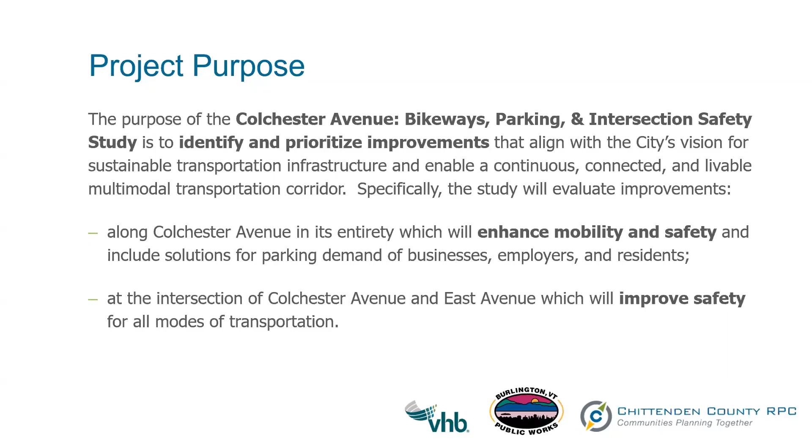The needs of the study were defined as the need to improve intersection safety, improve corridor safety, enhance mobility for bicyclists, and include solutions for parking demand of local businesses, employers, and residents.

And since we took a bit of a hiatus from the project, we thought a quick refresher seemed appropriate. So if you'll recall, last December, we had a local concerns meeting. Through multiple meetings with the advisory committee and the project team, we translated the existing conditions assessments we had done and those local concerns gathered from the community into opportunities and constraints. These opportunities and constraints, along with the project purpose and needs statement, really provided the guidebook for development of alternatives for the corridor.

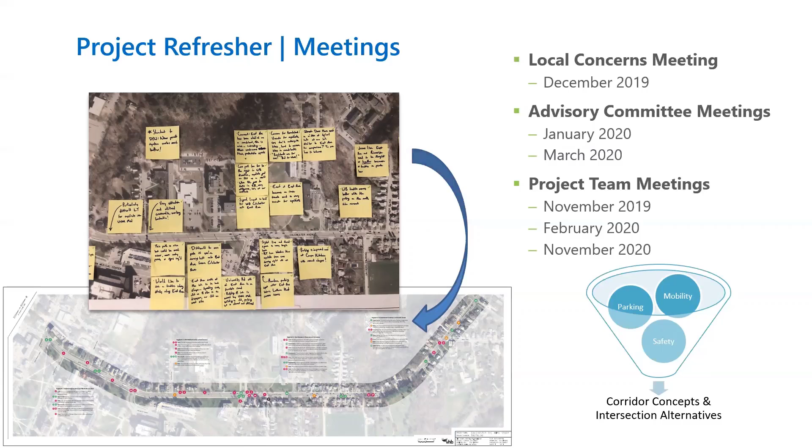It's important to note that there were really a broad range of concepts considered for the corridor, and acknowledge the efforts of the advisory committee and the project team to really narrow those concepts into a viable set of alternatives. This was particularly true for the bike mobility enhancements on the corridor. There were many options considered to improve bicycle mobility, including two-way cycle tracks, but ultimately, from the many options listed here, we narrowed them down to a set of really feasible solutions for the corridor.

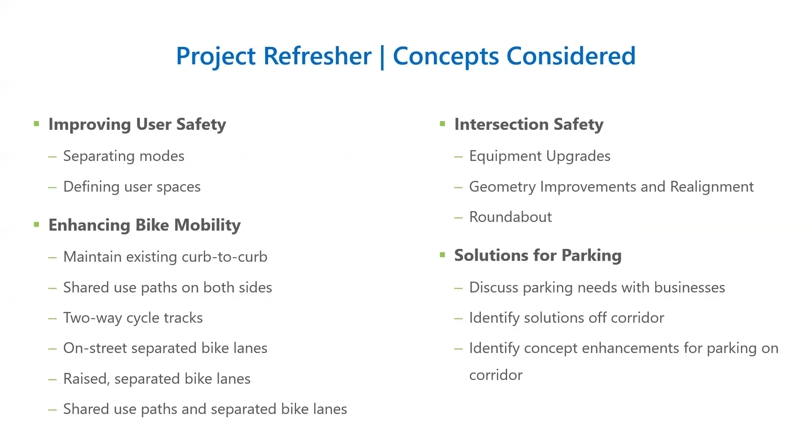It is important to note that short-term improvements have been exhausted along this corridor, and are really what exists out there on the road today. And so all of the alternatives that are considered here really require roadway reconstruction due to shifting curbs around.

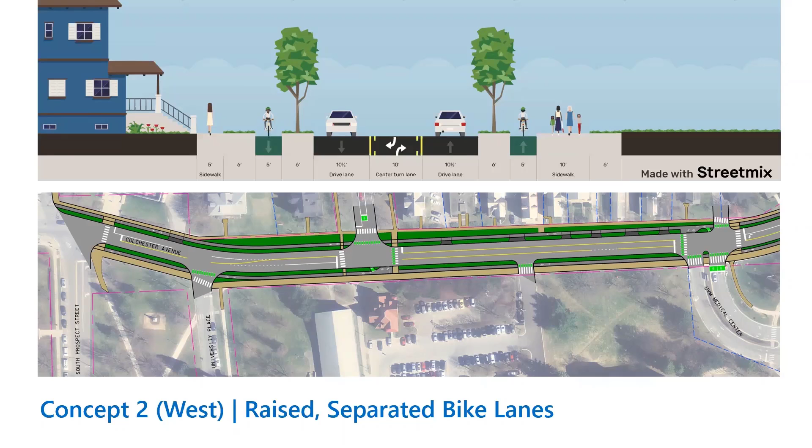And even with the widened grass strip, the area of impact does not extend beyond the existing back of sidewalk or back of shared use path on the south side. And given the vertical separation of this particular corridor concept, there's naturally more space for bikes and peds to operate separated from traffic. And continuing along this section, the grass strip does narrow. However, there's still enough space for a key feature of this particular concept, and that is a space provided for 2-stage left turns for bicyclists out of the street.

And this became an apparent need during our local concerns meeting, as there was a desire for improving conditions for east to west traveling bicyclists to access driveways or roadways or intersections along the corridor. And this concept accomplishes that while keeping the turning bicyclists separate from vehicle traffic and out of the way of through bicycle traffic and pedestrians.

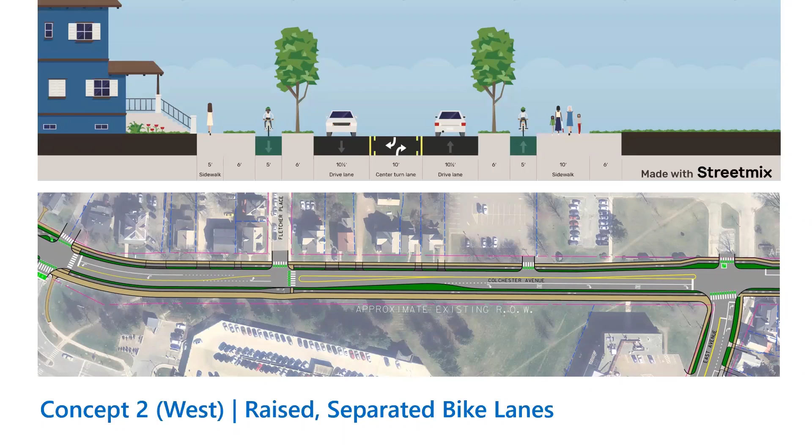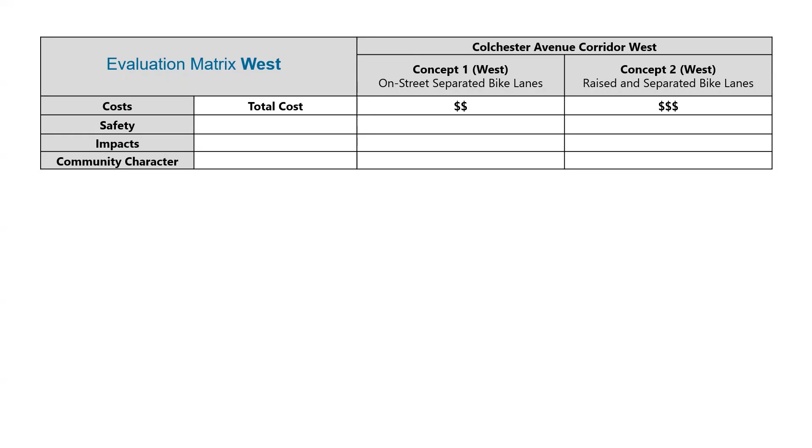Now, in order to better understand the impact and implication of these design concepts, we've developed evaluation matrices to compare side-by-side the critical concept factors as listed here, being cost, safety, impact on the built environment, and community character. Now, it's important to note that the cost evaluations are presented on a relative cost scale, as in one versus the other. So in our case, as Karen touched on, the big cost generated for each of these concepts is always going to be the relocation of the curb that comes with the widening of the roadway and significant reconstruction as a result. And the larger cost for concept 2 comes from the design implications of raising the bike lanes to being slightly separated from roadway and sidewalk grade, as opposed to just striping them in concept 1.

Now, the two concepts provide protected and separated facilities for all modes using this corridor, being pedestrians, bicyclists, and vehicles. And as a result, we see improvements to safety across the board. The main difference in these two concepts is that we may not see the quote unquote interested but concerned cyclist population with the on-street separated facility design, as there is still a certain level of perceived exposure to vehicular traffic when you're on the same grade operating as a bicyclist. Whereas these users are more likely to be comfortable along a raised and separated facility. And we've called out that these concepts also see improvements to pedestrian safety as well, because bicyclists currently using the shared use path along the south side will now have their own exclusive facility.

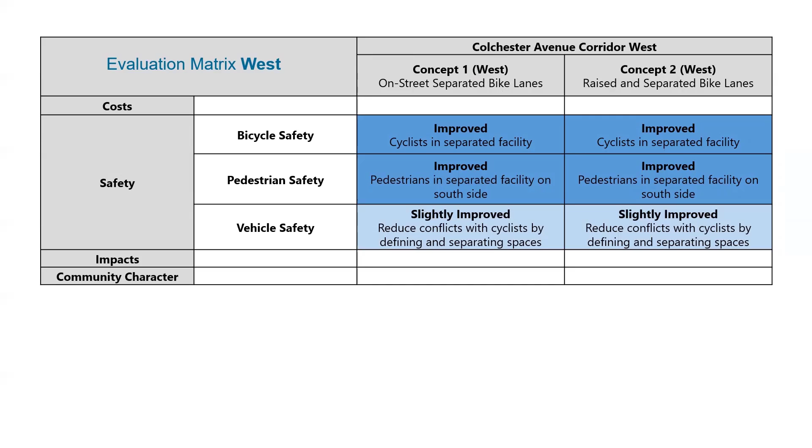And similar to the safety, we have similar impacts across the board for these alternatives in assessing this list of impacts we see here. And utilities will need to be shifted or relocated as a result of the shifting curbs and greenbelt. And as we have mentioned, all of the lower impact improvements have been made on the corridor. So when it comes to constructability with any of these alternatives, we see a major effort for that particular part of the evaluation of these alternatives.

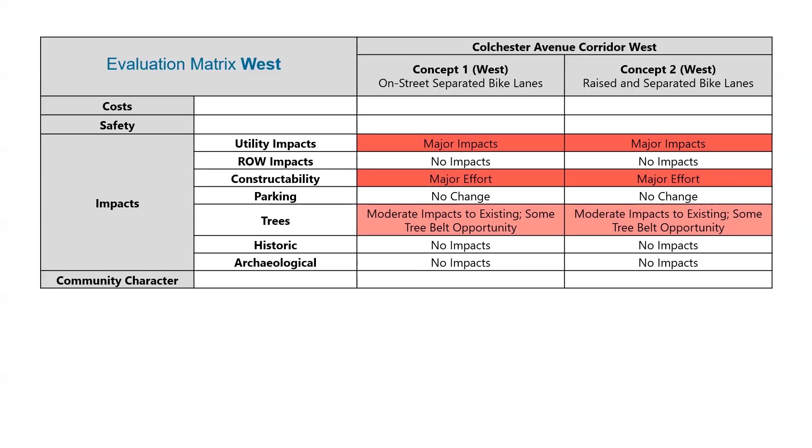And then there is no existing parking along the corridor, therefore no change. And then we are anticipating moderate impacts to some existing trees, given the modifications proposed to the tree belt. And as far as the final evaluation matrix row here for community character, concept 1 generally holds the existing aesthetic character of the corridor, while concept 2 we see as an improvement, given the improvements made to the greenbelt by widening it nearly the full length of the corridor, and in particular widening it to the west of the UVM Medical Center driveway to allow for tree plantings.

Thanks, Drew. Now we're going to jump into the eastern end of the corridor. We will go through a number of concepts for the sections along Colchester Avenue, between East Avenue and Barrett Street. Like the western sections of the corridor, concept 1 east changes the curb-to-curb width to better accommodate on-street separated bike lanes with buffers and a vertical element. So the key features to note with this concept are similar to concept 1 west, where there was a 5-foot bike lane and 3-foot buffer with that vertical element. In this section, however, there are a number of driveways, so the locations available for those vertical elements will be limited to allow access into those driveways.

Although the right-of-way line, which you're seeing here in sort of the pink color, is beyond the back of sidewalk, we attempted to limit the impacts to those adjacent properties where that generous right-of-way space is utilized as folks' front yards and off-street parking space. Along this section, there's a minimal green belt. There's one segment between the Centennial entrance and Green Mountain Cemetery where we'd expand that green belt, allowing for space for trees and other plantings. The segment in front of the Green Mountain Cemetery and around the curve in Colchester Avenue would require no green belt, just to avoid the significant slope work that would need to be done in order to extend beyond the existing back of sidewalk as it is today.

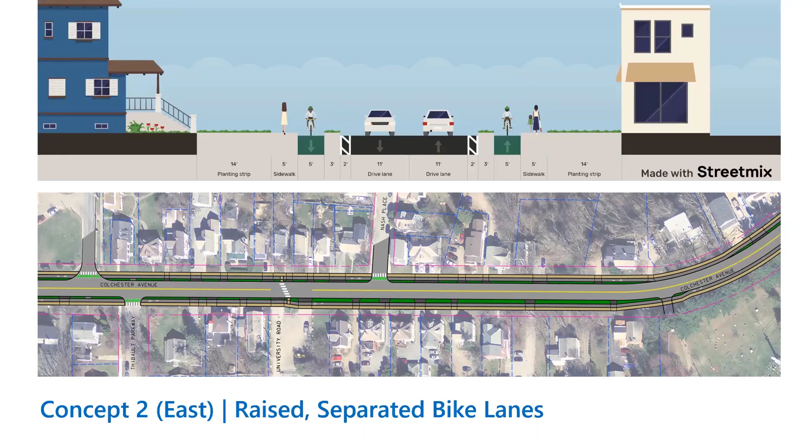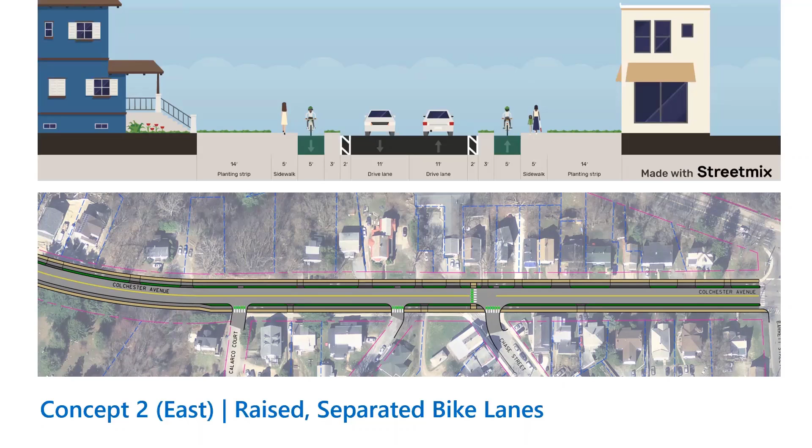And now we have our new concept 3 for the eastern section of the corridor. And this is just a reminder that for mobility, representing bicyclists and pedestrians, this cross section is generally the same as concept 2. The big difference here comes with the enhancements being made in an attempt to address the need for parking for residents and parking to support the local businesses along this section of the corridor.

And we can see that while the cross section is similar to concept 2, there is the addition of the on-street parking. And this truly represents the balance of trying to implement this parking while maintaining consistent facilities for bicyclists and pedestrians and other users along the corridor. And given the presence of businesses such as Kathy's Flowers and Campus Kitchen, during our local concerns and early public outreach efforts there was an express interest for parking to be retained along this segment of the corridor as much as possible. And that's what we've tried to show here.

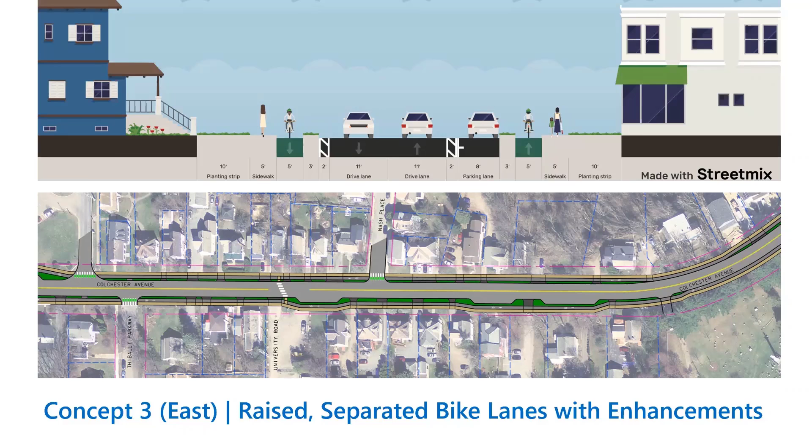And now east of this section, down to Barrett Street, the cross section and layout remain the same as concept 2. So we're going to skip ahead right into what we're referring to as concept 3A.

This concept was born as conversations developed with Campus Kitchen. It was noted that there was a strong desire to evaluate the possibility of maintaining short-term parking that would allow for high turnover parking and loading and unloading immediately in front of their location as it currently exists today. As a result, this specialized concept 3A was created. Concept 3A really mimics concept 3, as I'm sure you could have guessed, in its inclusion of on-street parking in select lower impact areas while also pursuing on-street parking immediately in front of Campus Kitchen.

Now, given the need to balance space for all users in this tighter cross section, this concept calls for a change to the corridor dynamics for bicyclists and pedestrians for the short section. That is highlighted in yellow on this slide, which is the creation of what we're calling a mixing zone, similar to a shared use path, immediately along the frontage of Campus Kitchen.

Given the nature of vehicular turnover in this location and parking and accessing Campus Kitchen, the project team believes it makes sense to really encourage slower movement speeds, particularly among bicyclists at this location, and create this shared space mixing zone. So that's what we've tried to do here in this short section with the narrow 8-foot shared use path across the frontage. We see this concept as truly representing a compromise for all modes in the greater interest of addressing all of the needs of the project as previously stated.

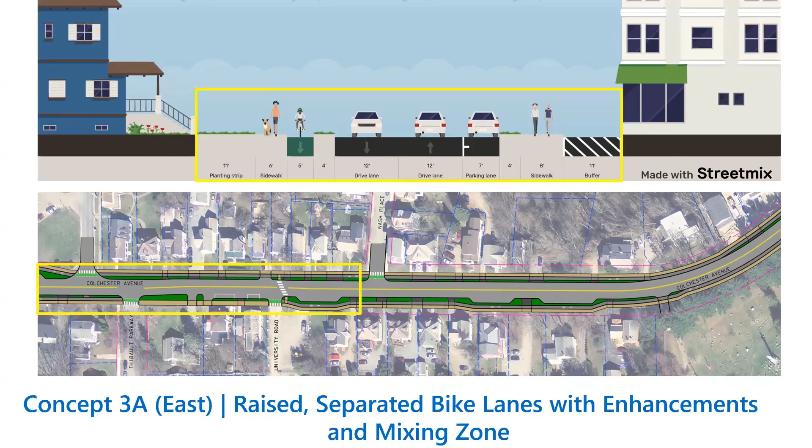All right, and with concept 4 East, we're taking a similar approach to the existing western section of the corridor, where that shared use path that was recently put in helps to accommodate both bicyclists and pedestrians on one side of the roadway. So this is taking from that idea that's out in the existing condition. Here we're seeing that shared use path on the north side of the corridor, coupled with the raised separated bike facility and sidewalk on the south side.

Putting that shared use path on the north side was really in anticipation of slow uphill cyclists, so folks coming up from the Winooski Bridge. The speed of the uphill cyclists makes mixing both bikes and peds more tolerable along this section of the corridor. It's important to note here that the back of sidewalk in this concept is generally within 1 to 2 feet of the existing back of sidewalk along this stretch.

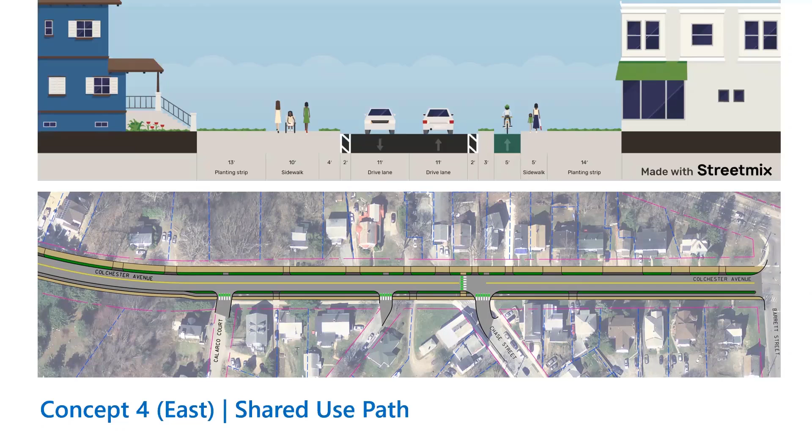Here's a continuation of that concept between Green Mountain Cemetery and Barrett Street. The shared use path in this case is on the west side of the corridor, or the uphill side of Colchester Avenue through this steep section. This again is coupled with that raised separated bike lane and sidewalk on the east side, or downhill side of this segment. The intent really is to mix the slow uphill cyclists with pedestrians, but separate the pedestrians and faster downhill cyclists on the downhill side. This design would stay within 1 to 2 feet of the existing back of sidewalk in terms of the impacts.

All right, and that wraps up the eastern section concepts. As we've mentioned, for the evaluations of these concepts, similar to the west end, these matrices were developed to compare each of these concepts to each other, assessed against the same four project characteristics: cost, safety, impacts, and overall community character.

These costs are once more presented on a relative scale. For this assessment, concept 1 was evaluated lower on the scale, as the only significant impact is widening of the curb to curb width and residual work that comes from that, whereas concepts 2 through 4 include that work in addition to establishing new raised and separated facilities off street, as we've discussed.

Now, looking at the safety along the corridor in general, the concepts are providing improvements over the existing conditions because, for the most part, we are providing a complete separation of various modes. There are slight discrepancies when looking at concepts 3A and 4. Concept 3A brings in the trade-off of accommodating additional parking with creating a shared mixing zone for bicyclists and pedestrians for a short section. Similarly, concept 4 has a shared facility along the north side for bicyclists and pedestrians traveling in the uphill or westbound direction.

As a result, we're calling this out as a combination of no change and/or a slightly worse case for pedestrians for these concepts, based on the fact that in the existing condition, pedestrians have their own space, being their sidewalk, and in the proposed concepts, we're proposing to share that space between bicyclists and pedestrians. And lastly, all concepts represent an improvement to vehicular safety, given that the travel lanes are now exclusively for vehicles rather than shared adjacent to the existing buffered bike lanes, or in some cases, the shared lane condition.

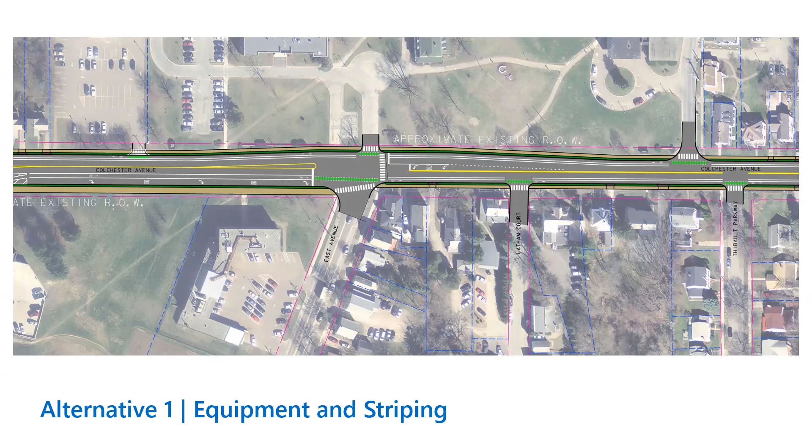And jumping into the third alternative for the intersection with East Avenue, it's similar to the concept Drew just shared, with the exception of the bike treatment.

So in this alternative, the intersection is realigned with that upgraded equipment and relocated equipment, like in alternative 2, but in this alternative, the eastbound bike lane is brought up to the intersection between the vehicle through and turn lanes. The expectation here is that the bicyclists will then be served at the signal with the through traffic. In this option, the bicyclist is more exposed than with the dedicated bike signal concept that Drew had just shown.

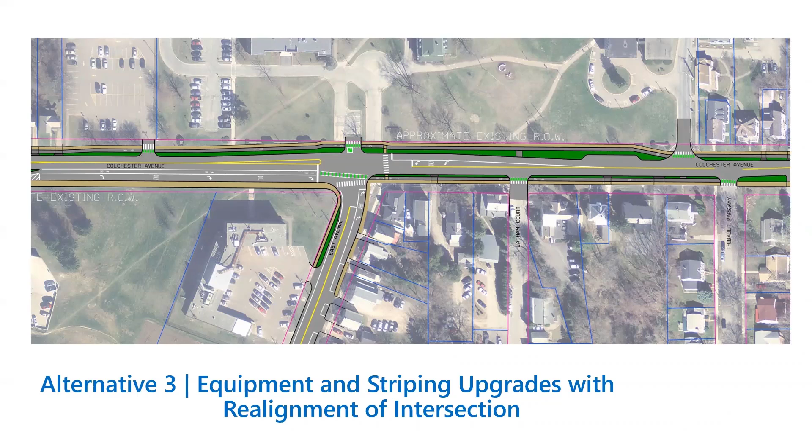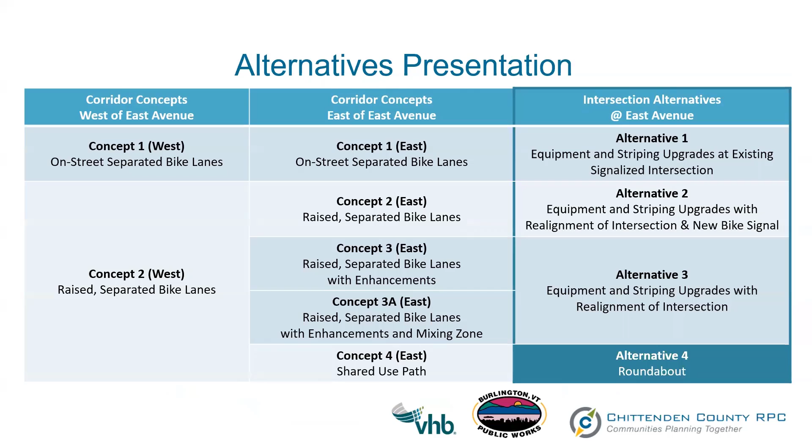And the fourth alternative for the intersection with East Avenue is carrying forward what we've seen from previous planning efforts, and that is to have a roundabout at this location. The roundabout, similar to the realignment options, would square up the intersection, bringing East Avenue in closer to a 90-degree angle with Colchester Avenue and realigning that entrance to Trinity campus.

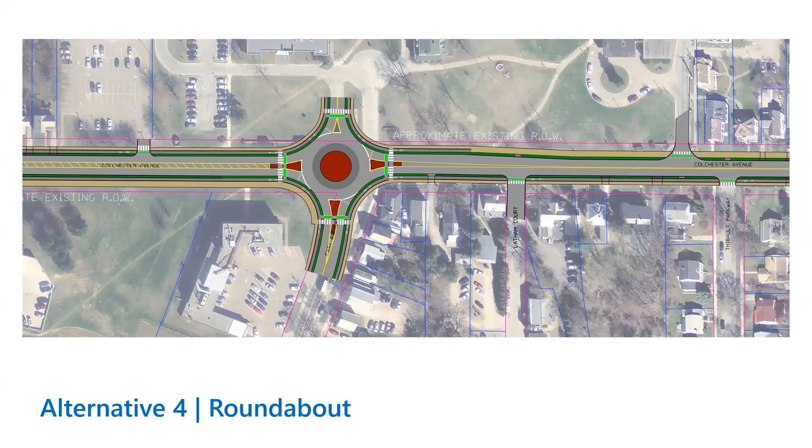The roundabout would have an inscribed diameter of 110 feet, as shown here, and would formalize the crossings for bikes and peds at all 4 approaches. So that's really providing more access than is available to bicyclists and pedestrians in the existing configuration.

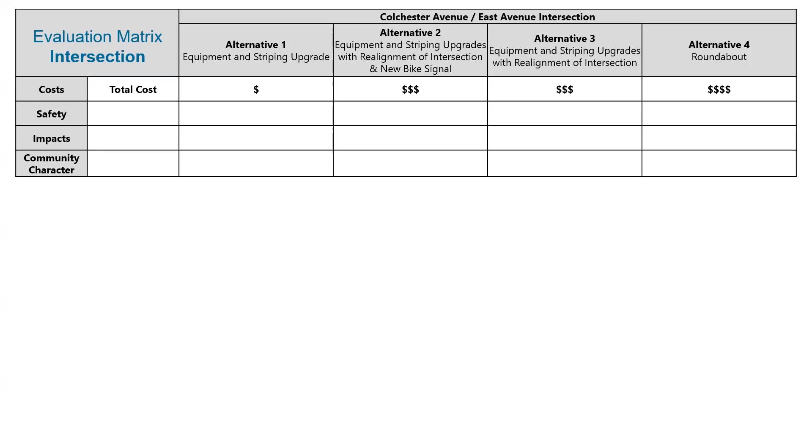And similar to the corridor concepts, the intersections were also evaluated through cost, safety, impacts, and community character metrics. So the relative cost of each intersection treatment ranges from simply upgrading and relocating equipment and striping, all the way up to the significant reconstruction work that would be involved in realignment or roundabout.

All right, so in terms of safety, for the vehicle safety evaluations of these alternatives, we turned back to the Highway Safety Improvement Program evaluation conducted for this intersection. That report really identified the predominant crash type at this high crash location as rear-end type crashes. These occur often when the light has just turned red and the second vehicle fails to stop, or just as the light has turned green.

And these crashes are really indicative of the signal head visibility issues that Drew had mentioned earlier. The report attributed these issues to poor alignment of the signal heads with each lane, the pedestal mounted equipment that's out there, and lack of signal head back plates. So all of the signalized intersection options presented here would update the equipment that's out there and relocate it appropriately.

The recommendations from the report to realign East Avenue and realign the UVM driveway are also considered in Alternative 2 and Alternative 3. Alternative 4 would lower vehicle speeds and have fewer conflict points just by way of that roundabout design. And because of this, the roundabout was considered to be a significant improvement over the existing condition for vehicular safety.

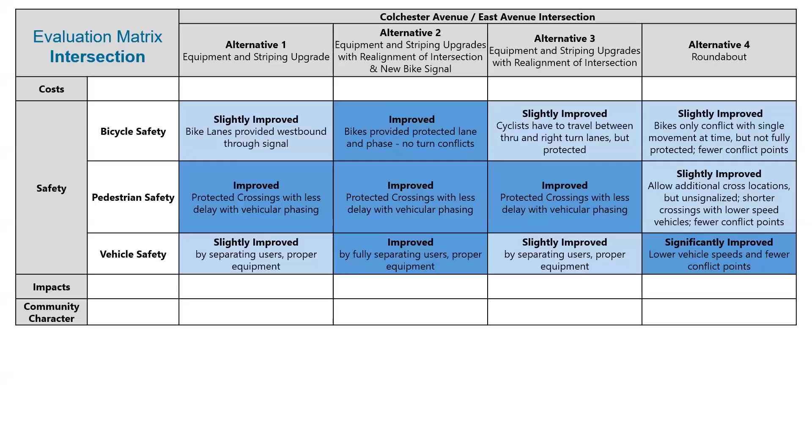The impacts of the intersection treatments were compared side by side, as you're seeing on your screen. In all 4 cases, there would be major impacts to utilities and minor impacts to right-of-way. For Alternative 1, this would involve new and/or relocated mast arm poles and mast arms, and more minor effort in terms of constructability. For the other alternatives, the major roadwork required for realignment or for a roundabout development would be pretty significant.

For the realignment and roundabout intersection treatments, there would be a reduction of 2 to 3 parking spaces along East Avenue and some minor tree impacts where there's 1 to 2 trees immediately adjacent to the intersection today that would be affected by the major reconstruction efforts involved in these 3 alternatives.

And then finally, an archaeological assessment of the corridor recommended that areas along the edge of the UVM Trinity campus, any areas in that space disturbed beyond the right-of-way, really should undergo additional review as part of the design and construction.

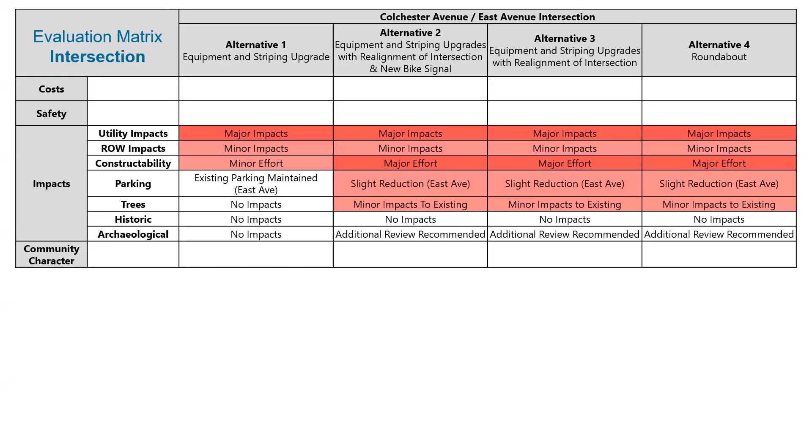And finally, in terms of community character, the alternatives that leverage curbing to separate facilities and provide greenbelt spaces are considered improvements to the aesthetics of the intersection. So that includes Alternatives 2 and 4. All of the intersection alternatives would satisfy the purpose and need, particularly in terms of safety.

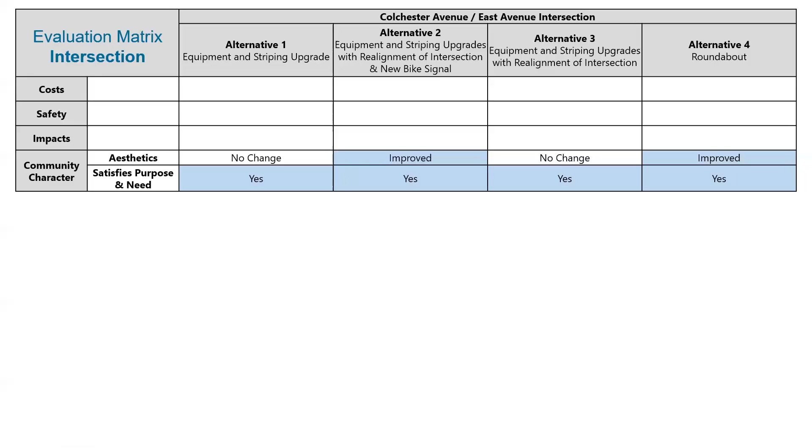So the upgrades to the equipment and striping would address the primary recommendations from that Highway Safety Improvement Program report. And realignments in Alternatives 2 and 3 would address the secondary recommendations from that report. The roundabout alternative would similarly provide significant improvements to safety at this high crash location intersection.

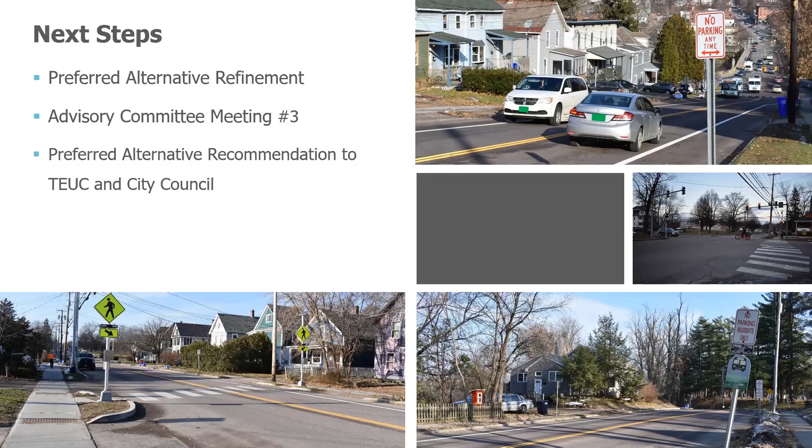All right, thank you, Karen, for reviewing all of the intersection alternative concepts there. And so that just about brings us to the end here. A quick review of our next steps: preferred alternative refinement, followed by a meeting with our advisory committee, which will be our final meeting. And then the selected preferred alternative from that will be presented to the city council for approval.

And just for everybody's benefit, again, if you have any feedback that you'd like to provide prior to the live meetings scheduled for January 11th, please do so to Jason Charest at the CCRPC, who is the project manager for this scoping study. And feel free to pause the recording as needed and write his information down. And we look forward to hearing from everybody.